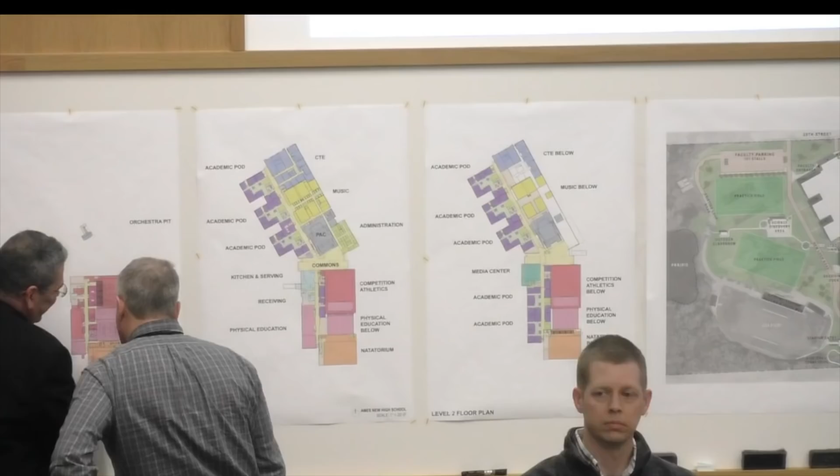But just to give you a quick overview, the building is three stories. We've got a basement level, shown in this plan on the left-hand side. It's a partial basement - it doesn't go underneath the entire building. This area, the south end of the building, is primarily the athletics area, color-coded by the program that's in it.

The orange is the pool or natatorium space. The pink is the physical education space, so practice gym, auxiliary gym, dance cheer room, and weight room. The red is the competition athletic facilities, like the main competition gym, the wrestling room, and then there's a bunch of locker room space down on that level 0 space.

There's also a little tiny space that shows up on that floor plan - that's the orchestra pit that serves the auditorium.

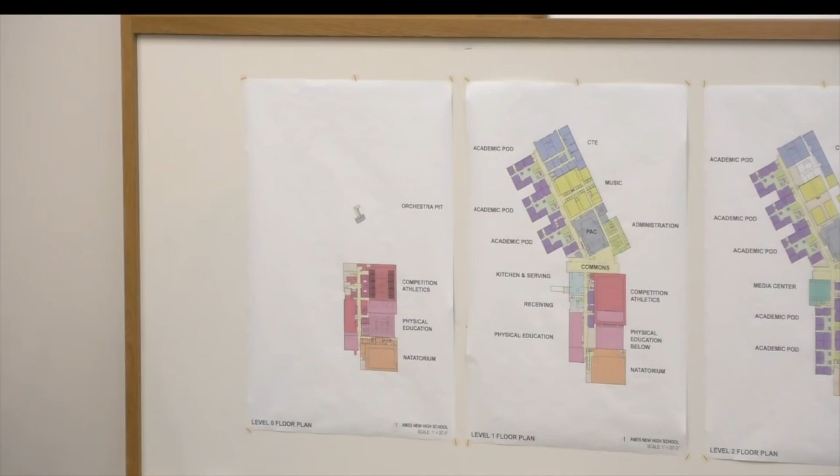Moving up to first floor, the plan in the middle here is first floor. Just to orient you, you've got the main entrance, which is on the site plan here - you can kind of see where the building makes a little bit of an angle in the middle. This is the main commons, lunchroom, hangout space in the building, and also the main entrance here on the east side. So when you come into that space, you'll go either to the north or to the south.

Again, the south is primarily athletics on this level. We do have some program space - we've got the culinary foods lab in this location, the kitchen that serves the common space here, and then a couple of other academic programs.

On the north side of the building, right off of the commons, you've got the auditorium space. This is situated so that after hours, the commons and the auditorium can be accessed without having access to the rest of the building. Similarly, the main entrance for spectators to any competition athletic events would be from the commons as well, so you've got a nice pre-function space before you go into the main viewing space.

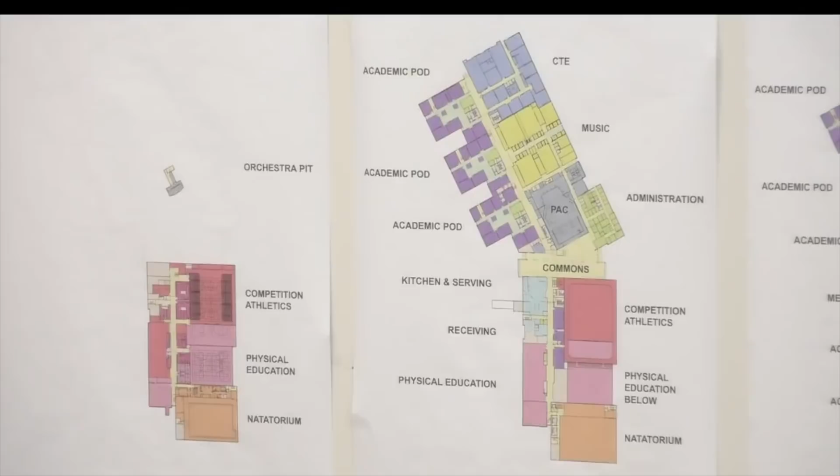The green is the main office for the building, so everybody coming in and going from the building will go right by the main office. During the school day, just like there is today, you have to go into a secure vestibule and then into the main office to check in or check out.

As I mentioned before, we've got the performing arts space here in this gray color in the middle. The auditorium seats 1,000 people and has a stage with a full fly loft, equipped for all types of performances, both music and theatrical.

The yellow is the music pod, so we've got band, choir, orchestra in that pod along with associated practice rooms and ensemble spaces. The blue on the far north end is the CTE pod, which includes programs like woods and metals, art, business, ag, and nursing. The purple and the light green are the academic pods, which would have all the main classrooms and science labs.

The second floor is fairly similar to the first - we've got again the classroom pods on the north and on the south of the second floor. Stitching the two of those together would be the media center in the middle. The media center looks out over the commons area, and it's positioned in that location so there can be some after-hours access.

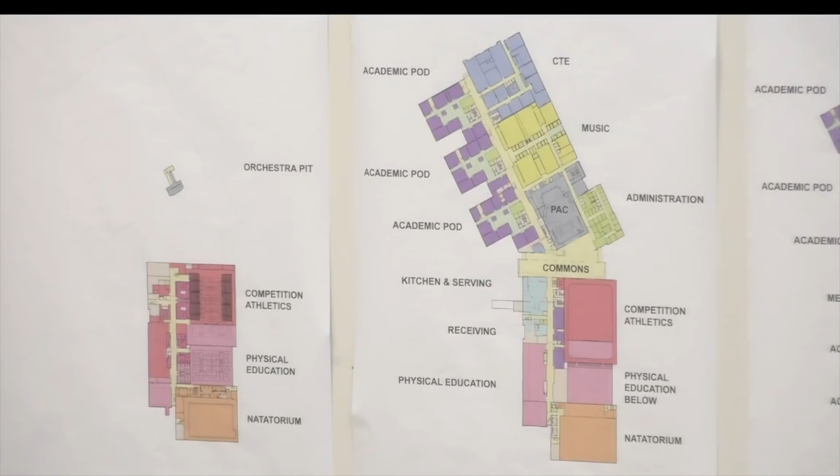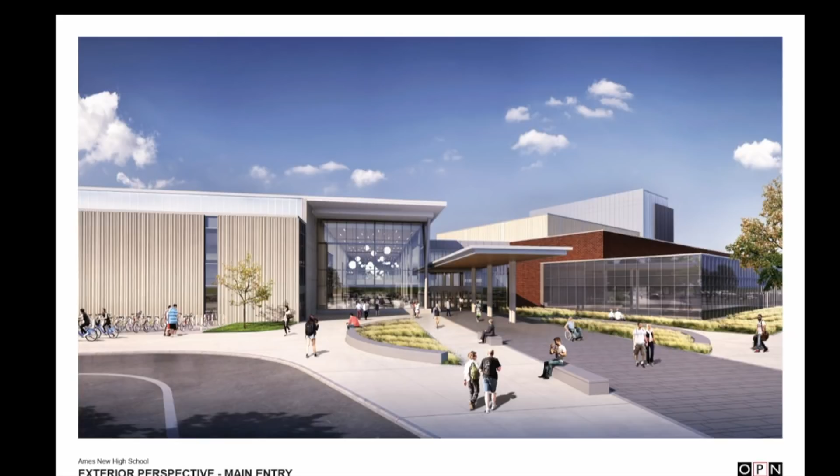Here's a view of the main entrance. We've just come up the main drive, and we're about where the student drop-off begins. We've got a view of the canopy here for students to come in. The main entrance is right underneath the canopy in this location, and the commons sits right behind the glass wall here. There's seating planned in and some plantings at the main entrance to create a friendly entrance to the building, providing space for students to wait for parents or others.

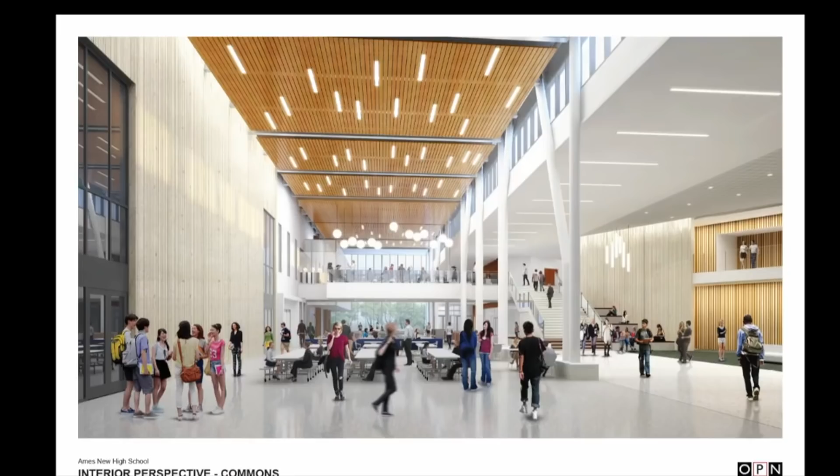Here's a view - we've just come into the building and we're standing in the main commons looking out to the west. The main commons stitches together all of those big function spaces. You've got the competition gym on the left-hand side here, with a set of doors going into that space. So if you're coming for a basketball game, you'd come in the main entrance and go through those doors to get to the game.

Also related to that is the auditorium. On this side of the commons is the main entrance to the auditorium, so if you're coming for a performance, you would come in the main entrance and go to the right to get into the auditorium. There's a main stair connecting the first and second levels in this location.

We are looking at opportunities throughout the building to provide collaborative space or space for students to hang out, so this stair has some built-in bench features. We call it the learning stair - it's an opportunity to provide that quick moment to sit.

In the bulk of the commons area, there'll be a wide variety of seating. This isn't exactly representative of what we'll have when the building opens, but we're looking at booth seating, banquettes, tables, chairs, and high tops - lots of variety to create something that's not so institutional feeling. Other ways we try to warm up the space include the wood ceiling element here and some natural light through a clerestory. So this will be a nice, light, bright space.

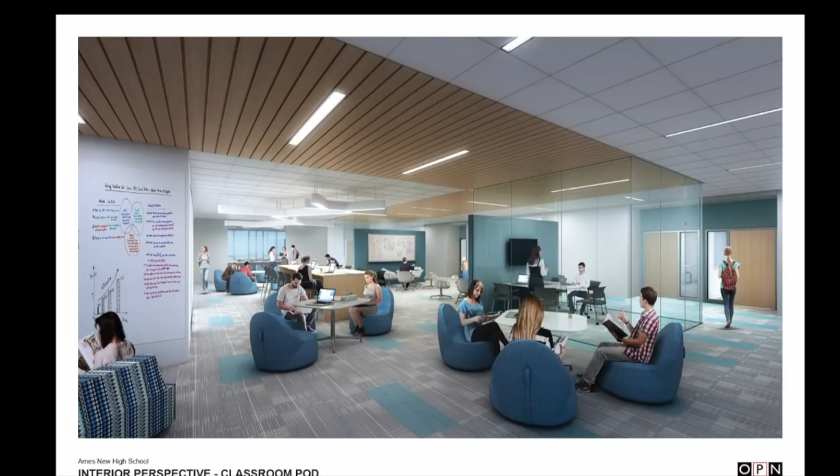This is a view just outside the pod. We're looking down the corridor. Each pod would have its own color scheme, so the colors begin to help with wayfinding, so you can find your way through this large building. The colors would be replicated in some of the furnishings, wall color, and carpet colors throughout the building.

We've been working on trying to find ways to break the size and extent of the corridor down and to bring natural light. We've got a clerestory up here to bring natural light down into the corridor, and there are some areas where the floors cut back so we'll bring natural light down to the first floor as well. Within the corridor are 2 main stairs in addition to the stair that's in the commons, so there'll be a lot of ways to get up and down and through the building.

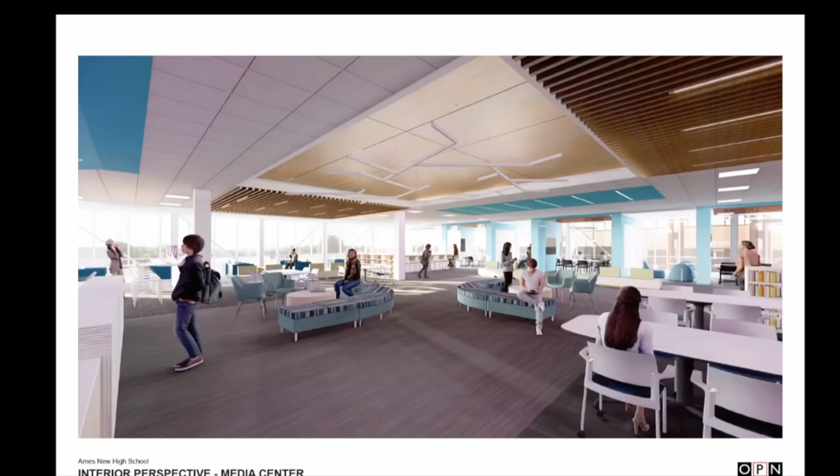This is a view of the media center, and we're standing right by the circulation desk. We're looking out to the west, so this would be a view of the prairie and over the practice fields. Off in this direction we're looking out over the commons, so you've got glass that looks into the commons area. Along this wall are some enclosed study and teaming spaces.

In these kinds of spaces, we're going to be providing a lot of different kinds of furniture to support different types of learning and different types of studying. There'll be different kinds of technology. Those are some things we begin to get to once we get a little closer to ordering those items, but this helps give you a sense for what it might look like.

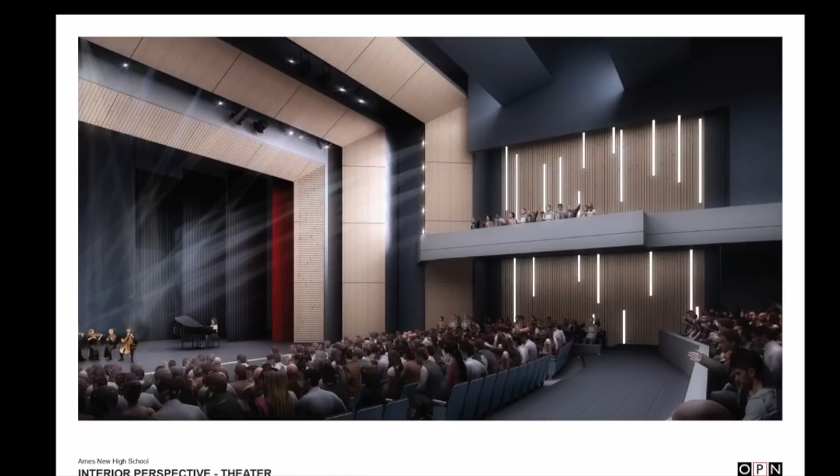This is a view of the theater, looking right at the stage. We're focusing a lot of our energies on what the theater looks like, the proscenium opening, what that looks like from the audience. It'll be well equipped, much better than what you have now, with lighting, rigging, and AV systems. We'll have some kind of house lighting, specialty lighting built into some of the sides to provide lighting when the lights are dimmed in the theater.

And again, there's an orchestra pit for musical performances, as well as the full fly for drama.

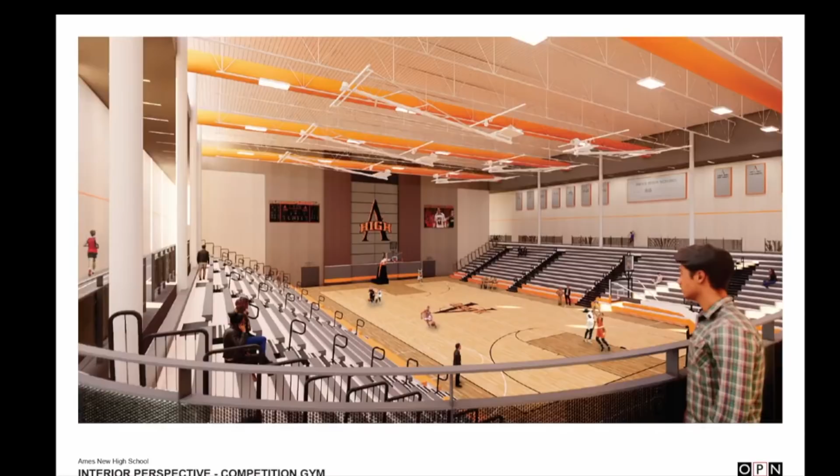Here's a view of the competition gym. We're standing on the track level. The competition gym and the auxiliary gym have a track that runs around the full perimeter of those spaces, and that's where the public, coming to a game, would come in through onto the track level and then go down to your seat in the bleachers.

There'll be a lot of great opportunities for branding the Ames High brand in this space on the wall in the back here, as well as some color schemes throughout the space, which show a little better probably on that screen. Again, we're bringing natural light into this space through clerestory lighting with some diffuse light so you don't feel like you're in a cave.

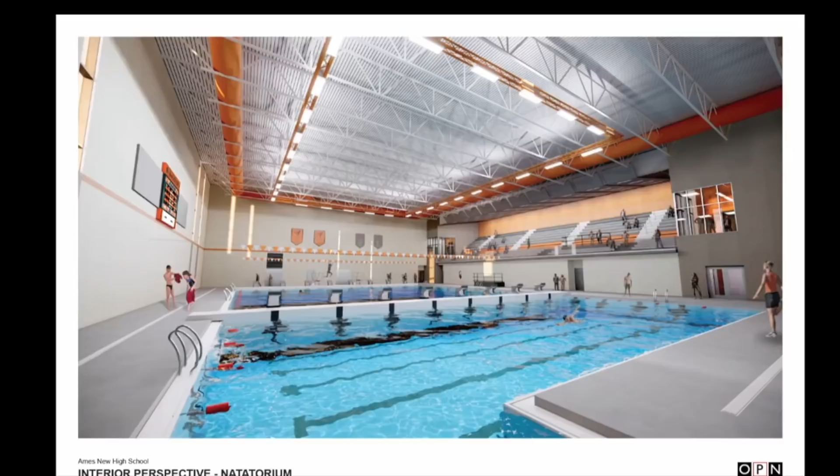The final image I have for you today is the pool, or the natatorium. The pool will have seating for around 500 people. It's a stretch 25 pool, and it has a movable bulkhead in the middle, which is the piece you see here.

The seating, spectator seating, is on level 2. You'd come in through a separate pool entrance, which on the site plan is located just south of the main entrance, and then from there there's a stair and elevator to get you to the pool level.

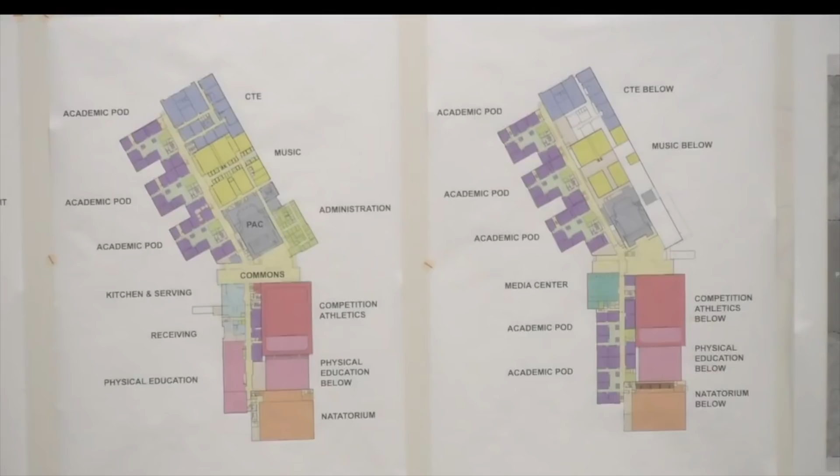The pool can be completely isolated from the high school for community use or outside use during the school day. The pool has its own concession area as well, built in over here, and then locker room space is located underneath the spectator seating area.

So let's talk about how we're going to build this project, how we're going to move through. The proximity of the new building to the existing building does create some challenges and presents the opportunity for disruption. So as we move through this, we'll be focused on minimizing disruption and mostly assuring that we're safe throughout. We'll have construction operations immediately adjacent to the project, and we'll be communicating with the school district to make sure everybody knows where we're going and how we're going to get there.

As I said earlier, we expect to start this in June of 2019, and we'll be starting on the southeast portion of the site, which is this area right here. That work will involve a geothermal system, which goes right here. We have storm detention, underground storm retention here. We have parking over the geothermal, and then this represents the south portion of the building, the gymnasium and pool portion.

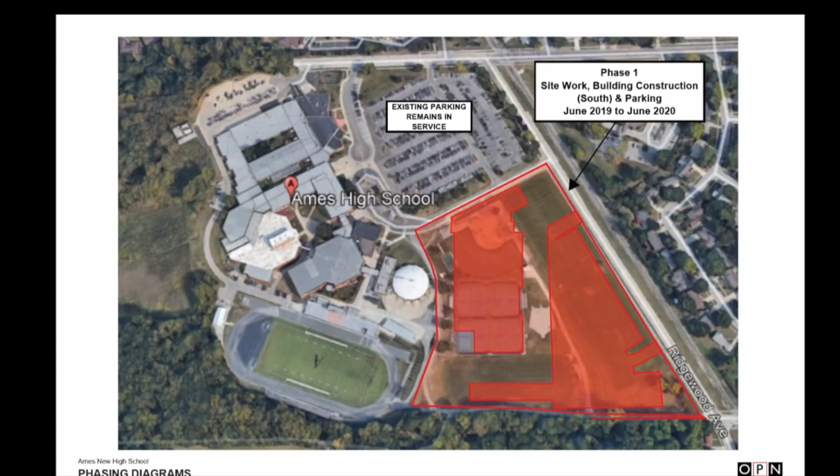As we move into what we're calling phase 2, we'll be taking over the whole site after the school is out in 2020. During that summer, one of our focuses will be completing this parking area right here. So when we get to August of 2020 and school starts, we'll have lost this parking lot, but we'll be bringing in part of the new parking here.

We think we can bring back about 300 to 325 stalls in this spot. So as we start school, student parking will be over here, and we'll be constructing and maintaining access up into the school and to the stadium through here.

We'll be doing some reconfiguring of paving up in this area to allow access and circulation in and out of here. We'll be starting foundations on the north half of the school, and we have a piece of utility work that we'll do in the summer of 2020 through this parking lot, which will be a cut and patch operation, putting it back in before school starts.

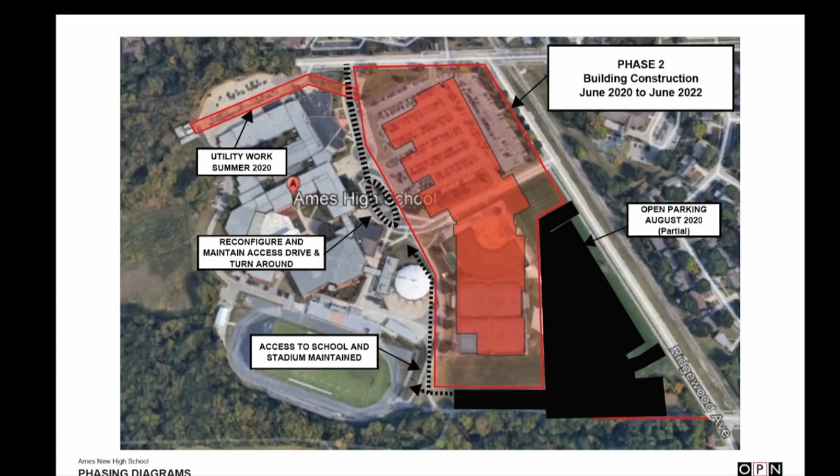This is probably the biggest pinch point in the schedule, in that we need to get moved out of this school. We're going to be moving out and back in through the east while we're constructing this, and we've got 2.5 months to do it. So we'll be strategizing on making sure that we can accomplish this.

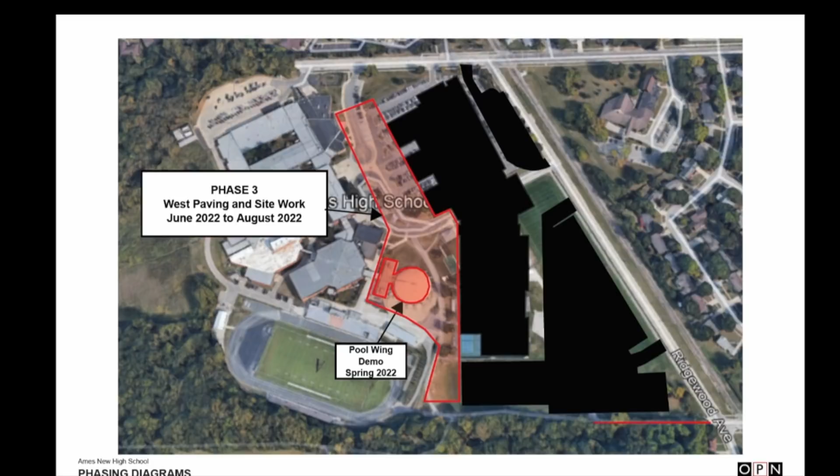So after that, we've moved into the new school. All the areas in black are in operation. We'll be relocating fencing to the site of the existing school and getting ready to bring it down. We'll go through a decommissioning and demolition phase. Decommissioning means disconnecting existing utilities, working through salvage, and there's a little bit of asbestos abatement to be done in that period.

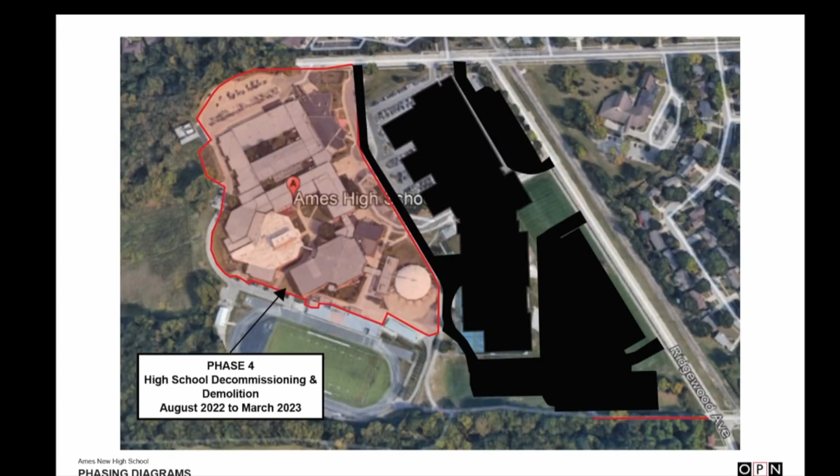Our goal will be to be in a position to start actual demolition activities on the school at the beginning of November or so. We think demolition activities will occur between November 1st and sometime in March. We would like to be ready to start doing earthwork and restoring grades, raising the grade to new grades as we move into the spring construction season.